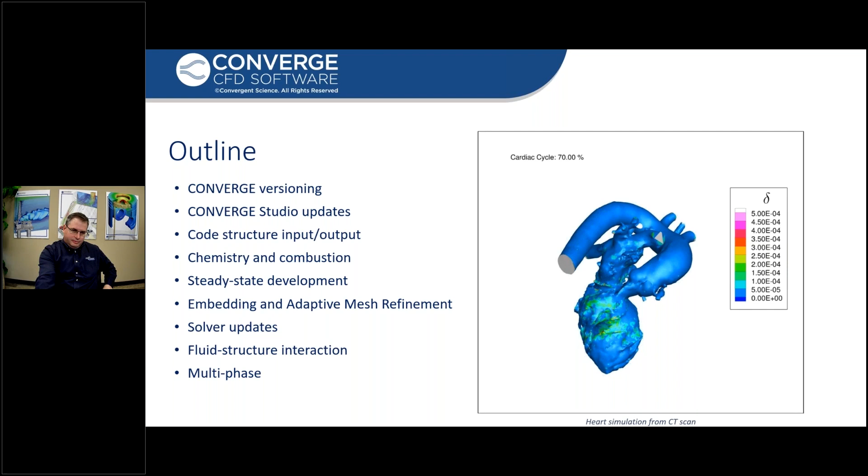So first of all, let's get the boring stuff out of the way here, and that's the CONVERGE versioning. For those of you that are current CONVERGE users, this actually is relevant. I know this doesn't seem really cool, but this is going to be relevant going forward when talking about CONVERGE versioning numbers. So traditionally, the first two numbers in the version have been representative of the major release. Those of you who've been with us for a while are familiar with 2.3, 2.4, 3.0, 3.1. Those represent major releases. And the minor releases are represented by the third digit.

With 3.0, we've had almost 30 of the minor releases. And so that's that third digit. Those have been released fairly regularly, every other month or so for some of these versions, and major releases have been released about every 2 years. We've also had multiple versions under active development and maintained simultaneously, recently as many as 4. The reason for that is we have customers that have been using older versions for some time. So the features that we would put in would get put into multiple versions, the current and the previous versions.

So going forward, we are going to adhere to the semantic versioning standard. I just want to state what the semantic versioning standard is, and then explain how that's going to impact CONVERGE. Given a version number, major, minor, patch, those are the 3 digits. The major version is when you make incompatible API changes, which for CONVERGE means input file changes. The minor version is when you add functionality in a backward compatible manner, so we add new features, but it still doesn't break inputs. And the patch version is when you make backward compatible bug fixes.

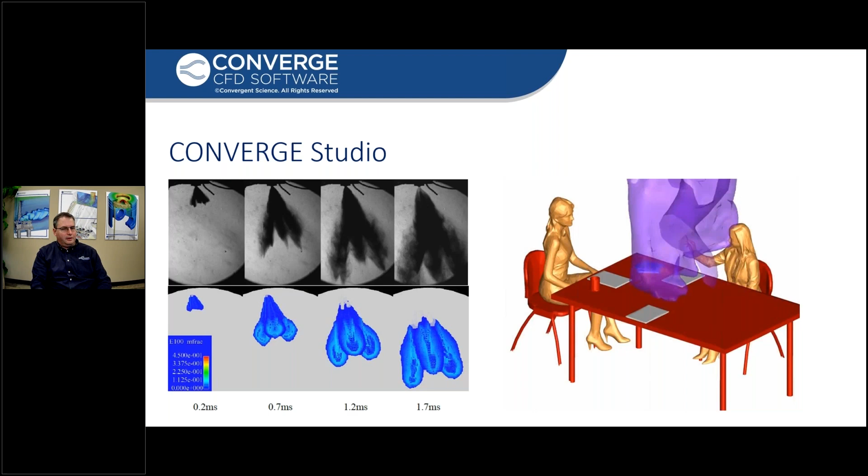All right, so first of all, let's talk about some of the improvements we've got in Converge Studio. So we've added something that's called a custom panel creation. So this came from a customer request. They wanted to have a simplified version of Studio available for some of their users that were not hardcore CFD users. These are some people within the company that needed to be able to run CFD, but wanted to simplify the inputs and just limit those things they could change.

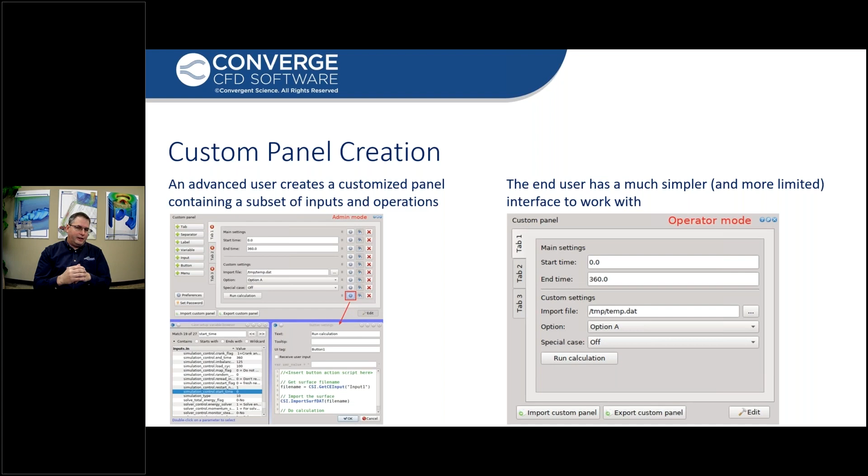So you still have the ability to go into the full mode if you want to make other changes that aren't given in this simplified panel. But this does simplify it significantly for those that don't want the full mode. The input files that get exported are still the full input files, so nothing's changing on the solver side.

So we've integrated ParaView into Converge Studio. As you're probably aware, ParaView is an open source software, and users are allowed to modify it and make changes to it. So we've done that and made a customized version that's simplified specifically for Converge, and we put this in Studio.

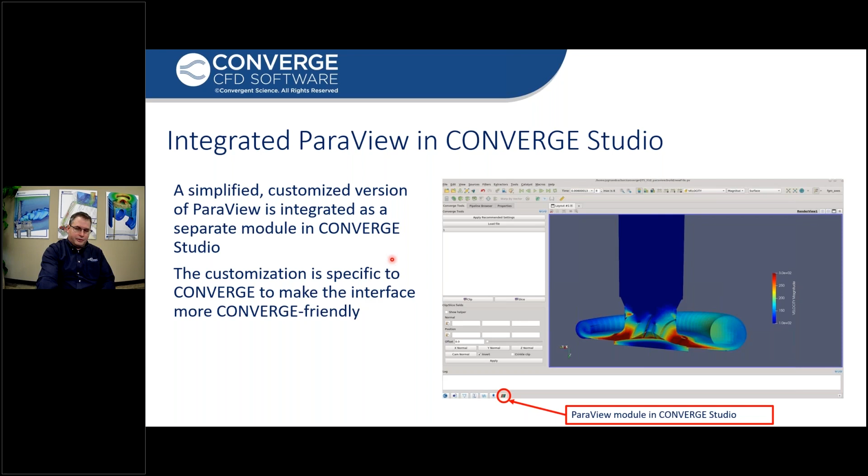So here are a few things I'm going to talk about. These are not currently available, but we anticipate these being available in a later version 4 release. So we're working on implementing basic CAD capability into Converge Studio. So this isn't going to be a full-blown CAD package, but we have licensed CAD capable libraries from Spatial, and we're working on implementing those to an interface in Converge Studio that will give you basic CAD capability.

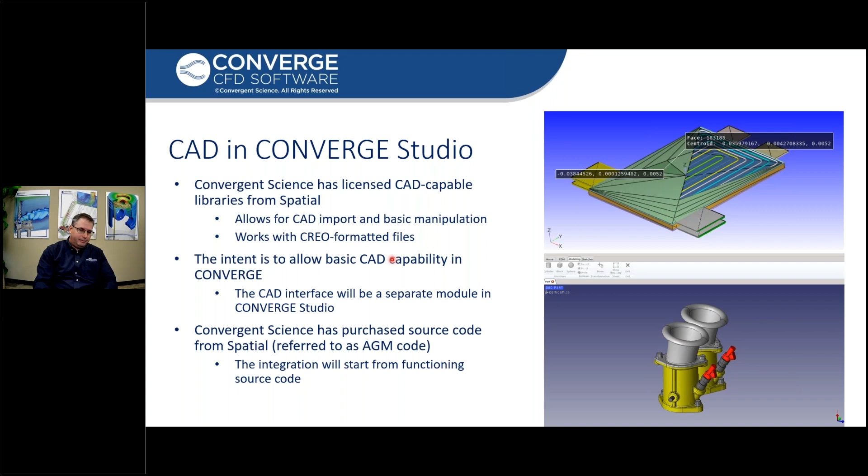We're going to have a new feature coming later in version 4 that allows Converge to do 1D simulations directly in Converge. We have had the ability and still have the ability to interface with other 1D codes and have the two codes communicate with each other at those interfaces between 3D and 1D.

The idea going forward here is to allow for the user to specify some portions of the domain that they import into Studio, specify some portions as 1D and some portions as 3D, and they'll be solved in the same Converge simulation, 1D and 3D together.

So a big part of that is the setup in Studio, allowing the user to specify what portions of the domain are 1D, and then creating from the actual geometry that's imported into Studio, creating one-dimensional cells. So this won't be parts that are linked together like you would see in some 1D setups. This is an actual geometry that you import and then specify what parts of it are 1D, and you use the tools in Studio to set that up.

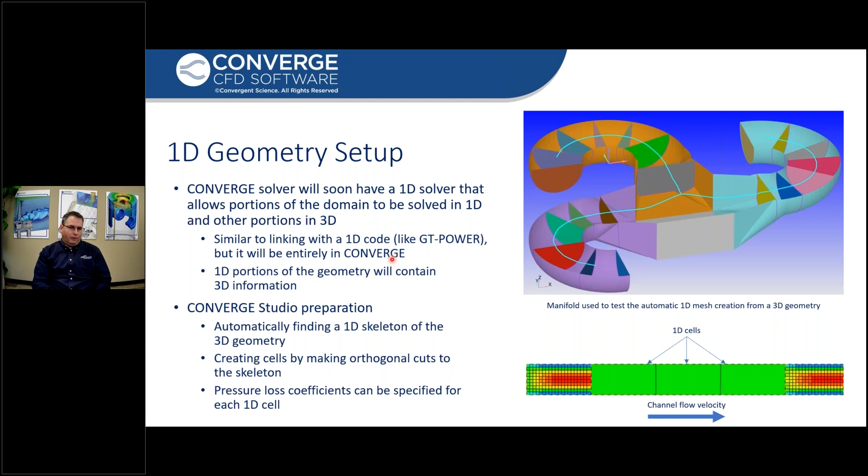So here's some other new features that will be coming out in Converge Studio. So we've got CGNS support for representing the geometry. Currently, we read your input geometry in a surface.dat format, which is our own ASCII format that we've come up with. Now you'll be able to import CGNS geometry directly, both representing the surface and representing intrinsic cell types if you're using an inlaid grid.

We're going to expand that custom panel capability that we showed to give application-specific setup capabilities. So we can use that same custom panel capability to create our own application-specific wizards that hide unnecessary details. We're continuing to expand our inlaid and boundary layer extrusion tools to make it easier for users to create inlaid meshes. And there's some improvement that's been made on the back end to speed up rendering of large geometries.

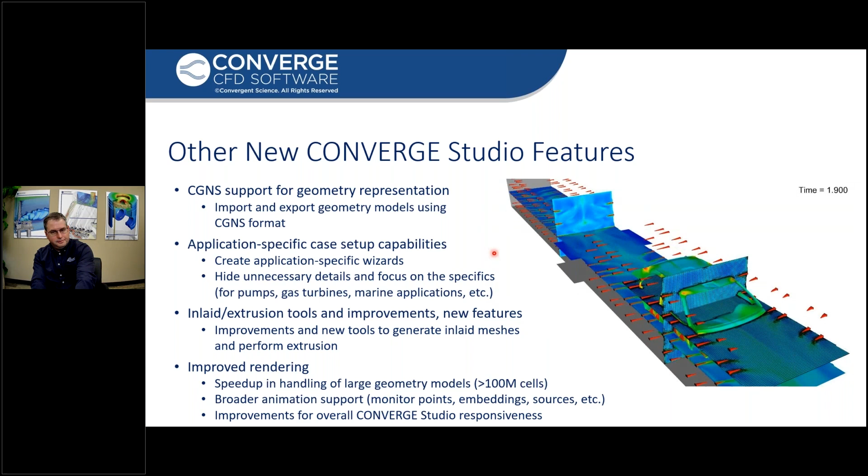So we made some changes to the I/O. Let's talk a little bit about output files. So as I mentioned, in Studio, you can import the surface geometry in CGNS format. We've also added the ability to output Converge post files in CGNS format. So we've had our own HDF5 format that's close to CGNS, but we've made some changes to it to make it actual CGNS format now. So those will still be able to be read into ParaView and TecPlot, but they should also be able to be read into any other CGNS capable post processor.

We've added the ability to export your 3D output for a limited set of regions. So if you only care about what's happening in the cylinder, you can output for region 0 only, if region 0 is your cylinder. That'll allow you to output significantly less output, and it can save on your data storage. We've added surface output to ParaView Catalyst. So previously we've just had cell data output, but now you can output boundary information on the surface to ParaView Catalyst.

We will soon have serial output capability. That will allow you to write output on only the head node if you're running a parallel simulation. So this can be beneficial if you don't have a high-speed parallel file system. You may have only the head node has access to the file system and each of the compute nodes don't. And so this will support that type of architecture setup.

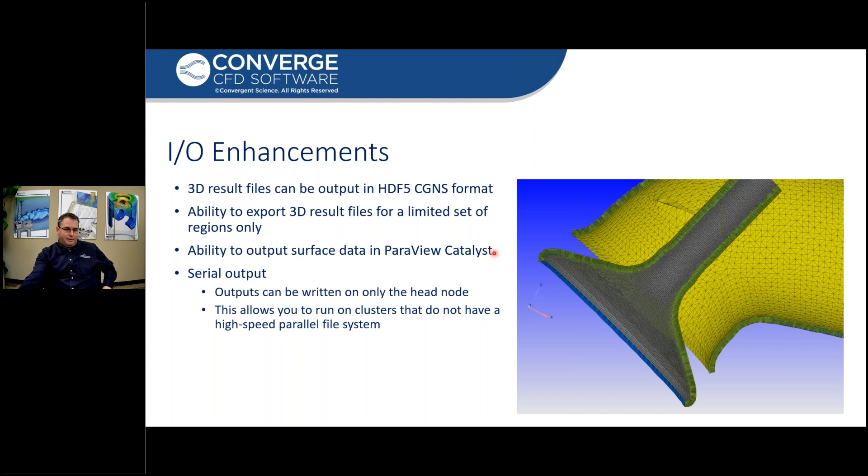We've added the ability for the user to create their own custom output files. When I say output files here, I'm talking about the line plotting data. So those of you that run Converge are aware that we have a lot of these text output files for doing line plotting. And sometimes you have to pull columns from many different files to put together into a single plot or single presentation. Well, you can specify ahead of time in Converge as an input file which columns from which files you want combined into one combined output file.

We've made some changes to our UDF framework. Going to version 3 from 2.x represented significant changes in our UDFs. And so there was quite a bit of effort that users had to put in updating their UDFs for version 3 and 3.1. So version 4 is going to have some tweaks to that UDF framework. We've got a lot of changes that have been made in the back end, and this works better with our back end. This will not represent a huge change to your UDFs. It should be on the order of 10 to 15 minutes per UDF to change some of the headers at the top. You're not going to be changing the main code in your UDF.

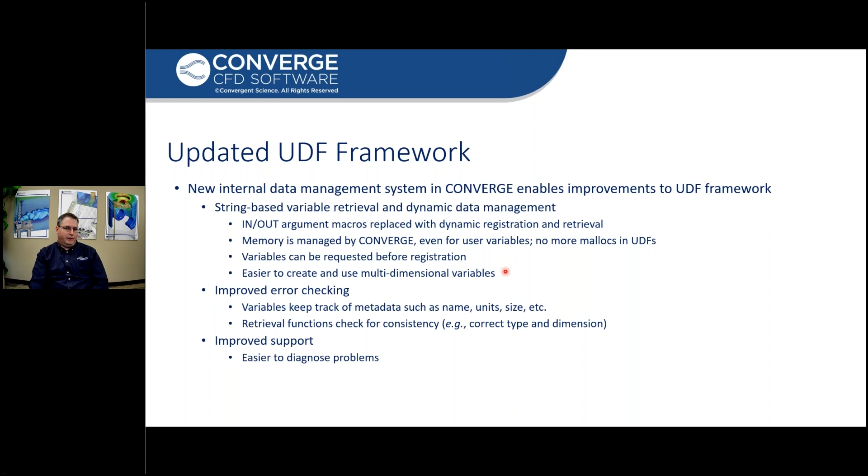All right, let's talk about changes that are coming up in chemistry and combustion. So we've added what's called a surrogate fuel composition blender. So let's say you have some alternative fuel, or you have some fuel that you don't have a lot of data for yet. You know some of the physical properties for it, but you don't know everything, and you don't have all the data necessary to run it.

Well, the surrogate blender tool allows the user to input some of the targets: molecular weight, hydrogen to carbon ratio, your oxygen to carbon ratios. You can give it octane or cetane number, ignition delay, anything that you do know about the fuel, you can input, and then you tell it which species you want to use for the composition.

And then the surrogate fuel blender will try to match your targets by varying the species composition from the species that you're allowing. So this is a way to come up with a fuel composition if you don't have one already ahead of time, if you just have a fuel that you know some properties for.

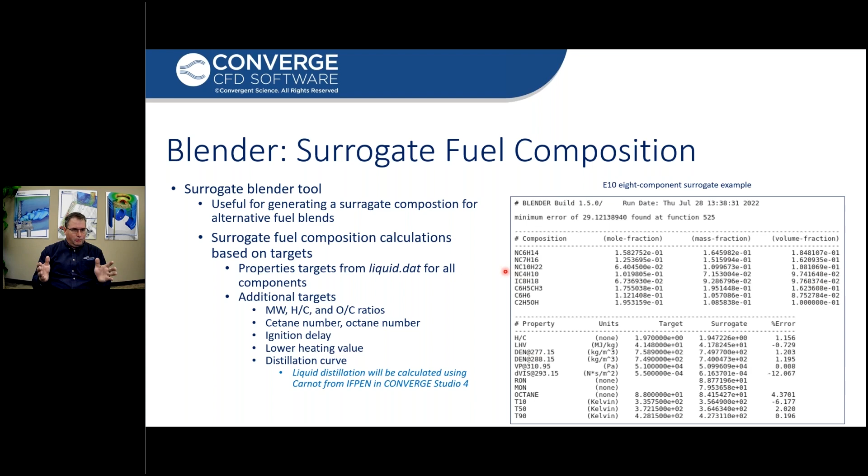We've added more mechanism reduction and tuning capabilities in Converge 4. We've had capabilities for quite a while, but we've got some additional features here. So we've got a utility to reduce and tune a mechanism based on 0D ignition delay and 1D flame speed. This enhances those that were available in version 3.1. You can also do mechanism tuning based on laminar flame speeds using our built-in premixed 1D solver.

Converge 4 allows for unlimited targets for the 0D and 1D reactors. We've also added sensitivity analysis for several of the 0D and 1D reactor types.

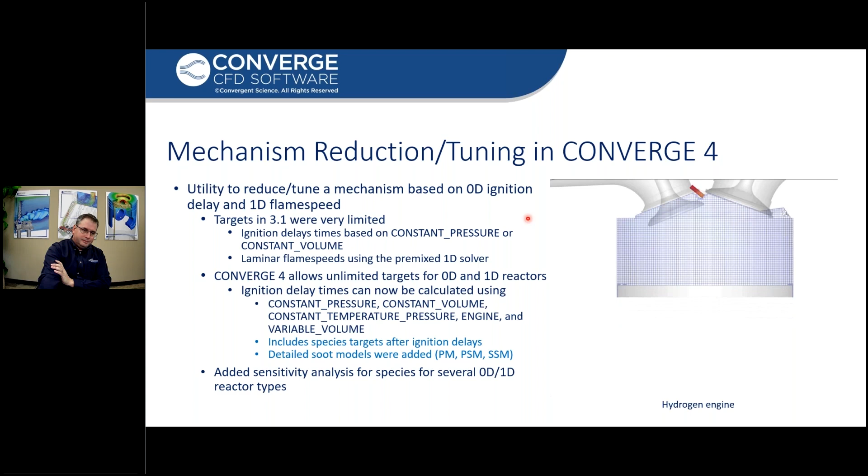So, the thickened flame model. The thickened flame model has been available for LES in some pre-release versions in 3.1. We've had this available for a while. These become standard features in version 4. The idea with thickened flame is to give you a sufficient number of grid points inside the flame. We need at least 4 grid points inside the flame to get an accurate flame speed.

For LES, we typically don't have enough of the turbulence viscosity to give us that flame thickness to give us the 4 points. And so what the thickened flame model does is it artificially thickens the flame to give you sufficient grid resolution, and it trades off the viscosity associated with that thickened flame for chemical reaction rates. So if you do the proper trade-off, you can still get the correct laminar flame speed by thickening the flame. So this is not something that we invented. This is something that's been around for some time and useful for LES.

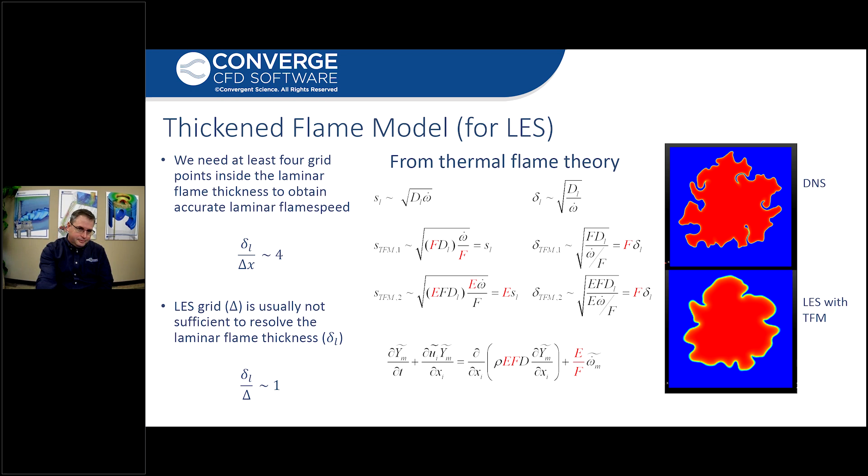New for version 4 is thickened flame for RANS. The same principles that make thickened flame useful for LES also make it useful for RANS in situations where your laminar flame speeds are going to be very, very fast. You're going to have very thin flame thicknesses. So one example of that would be when you have a hydrogen fuel. Hydrogen flame speeds can be much, much higher than what you typically have in other hydrocarbons.

And so you can have turbulent flame thicknesses that are smaller than 1 millimeter. And resolving those flame thicknesses, even in a RANS simulation, becomes too expensive. So what's been developed is thickened flame for RANS, which makes simulating hydrogen much more reasonable when you're using a thickened flame model.

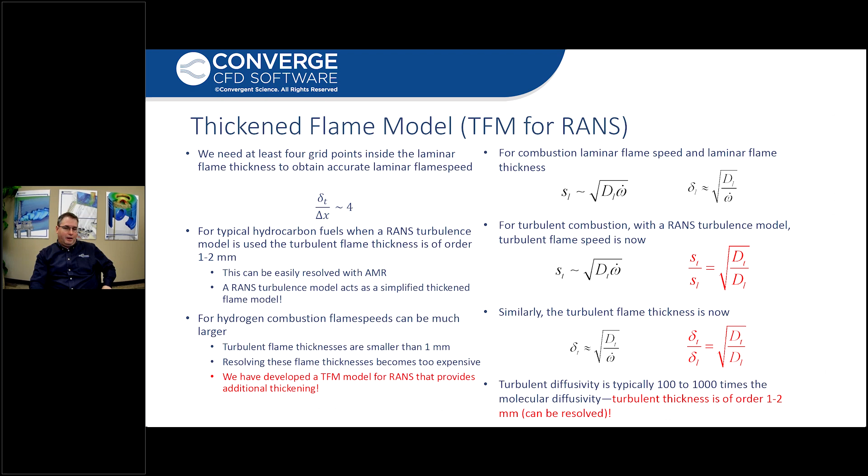So here's just a quick example of that. What we're showing here is the pressure trace for hydrogen combustion. Here we don't use any thickened flame, and we have 4 levels of AMR. This would be consistent with what you would see in a typical hydrocarbon fuel combustion. And you're seeing that you get basically a massive spike. In fact, the simulation was stopped here because all the combustion just went off instantaneously, because the hydrogen laminar flame speed is so fast.

Okay, and then we've got 4 other plots that are shown here, and these are for different thickening factors. So you can see with the thickening factor of 16 and 3 levels of AMR, that's the blue curve that's a little bit off. The combustion's a little slower than the other 3, but the last 3 with different thickening factors and levels of AMR all fall on top of each other. On the right, we're showing the heat release rate for those examples.

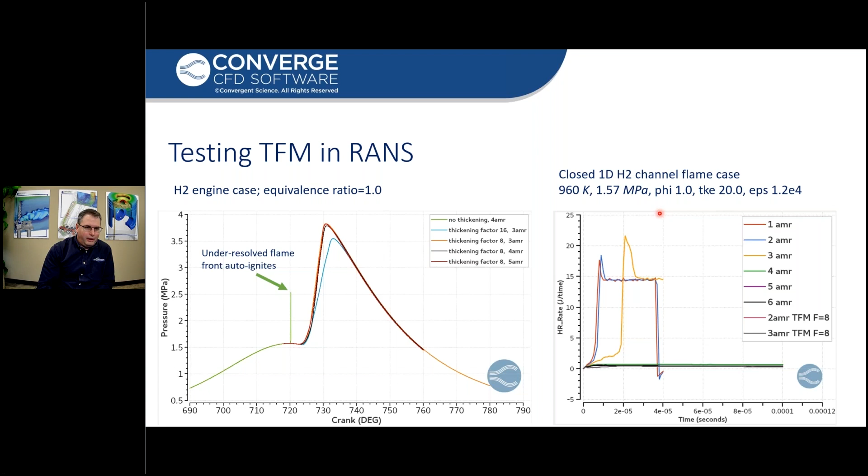So this thickened flame, we're actually really excited about this. Hydrogen combustion is very popular these days, and we need a reliable way to simulate hydrogen combustion in engines.

So the ECFM3Z model has been modified to allow nitrogen. We've had general fuel definitions in the past where you specified your carbon, hydrogen, and oxygen species ratios, but it limits what you can simulate. We want to be able to simulate ammonia and hydrogen, so adding nitrogen to the general fuel definition allows us to do that.

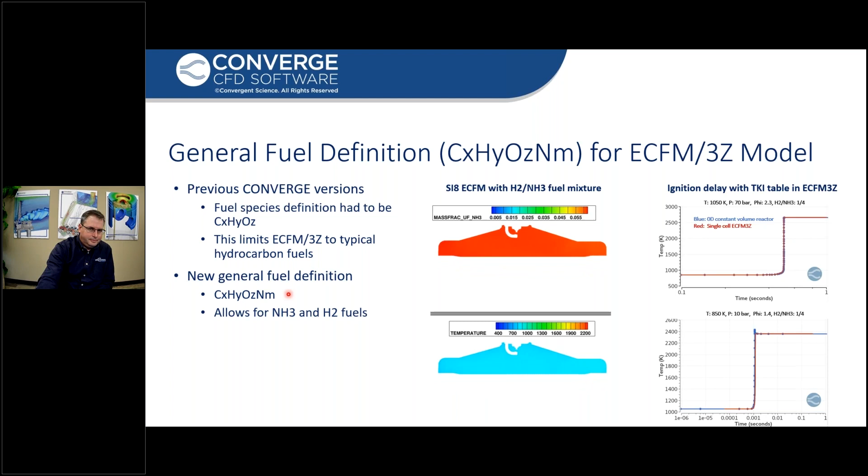We've got a new spark ignition model. The conventional way of doing spark ignition is the user just specifies a region in between the electrodes of the spark plug where we would add a source, and that source was usually just fixed in that location. Well, we know that's not physical, that's not the way it really happens. So we've worked with both Argonne National Lab and Southwest Research Institute to add a new spark model that includes some of the best of both of those research efforts we've been working on with them.

So there are some additional features. We've got a secondary circuit model if you can put in the electrical information.

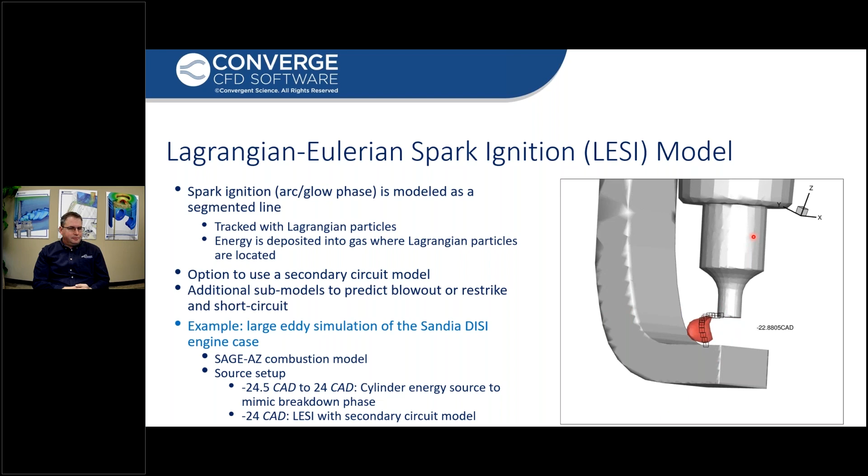There are several other things we're doing for combustion development. We're continuing to make improvements as part of the Computational Chemistry Consortium, so we're improving diesel and gasoline surrogates with that. Also as part of the Computational Chemistry Consortium, we're looking at alternative fuels like hydrogen, ammonia, and methanol.

One of the things that's not available yet, but will be soon, is the quasi-steady state species approximation. It allows us to have some of the species in your mechanism treated as pseudo-steady state, so they're not actually transported, and that simplifies the number of species being transported to speed up your simulation. We're also looking at using artificial intelligence, specifically neural networks, to replace the direct chemistry solve.

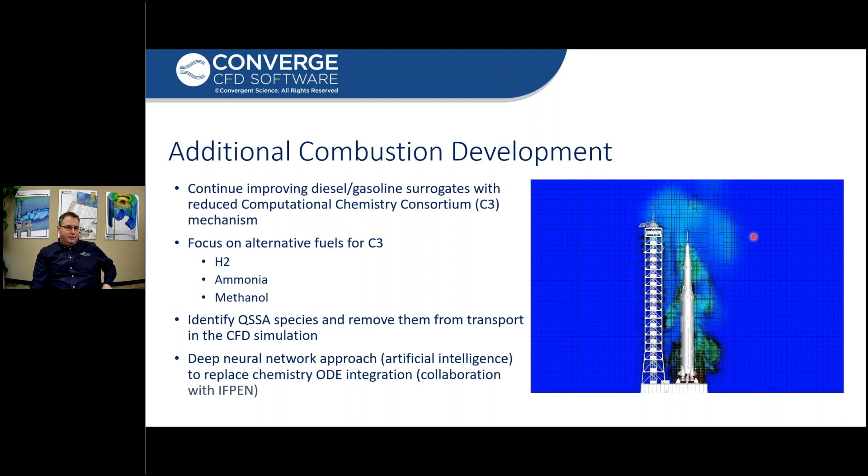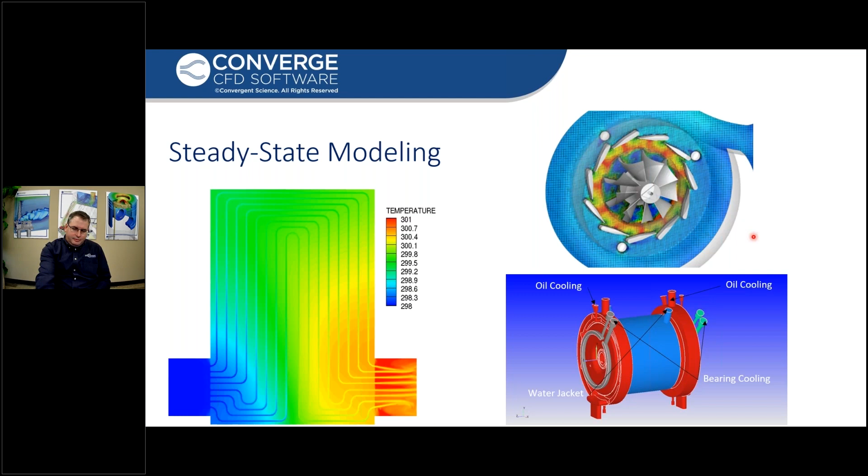So we spent a lot of time working on steady state modeling. We'll talk briefly about what we have coming up in version 4 with that. In the past, the steady state solver available in Converge is a pseudo transient solver, so it uses time marching to reach steady state, and we still have a d/dt term on the left-hand side.

So the convergence rates for a pseudo transient solver can be a little bit slower, resulting in longer run times, and sometimes the residuals don't converge very well. Now, the residuals not converging does not mean that it's not a well-posed problem. The residuals sometimes don't converge because when you're doing a transient type solution, you have some behavior in steady state solutions that is inherently transient and not steady state and continues to oscillate. So that can make it difficult to get residuals to converge. That doesn't mean it's an error, but we do need residuals to converge if we're going to take this steady state solver and use it in something like an adjoint solver for optimization.

So we've been working on a new under relaxation based steady state solver. You may see an acronym URS, and that's what it stands for—the under relaxation steady solver. This does not have a time step specifically, but it uses under relaxation. Now, that under relaxation used in place of a transient term still gives it somewhat of a transient behavior, but it's not transiently accurate. This is typically much faster than the pseudo-transient solver, and the residuals converge better.

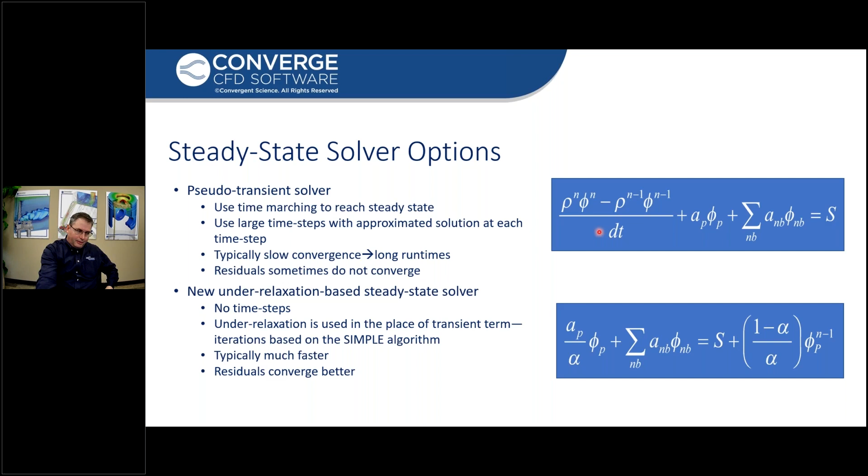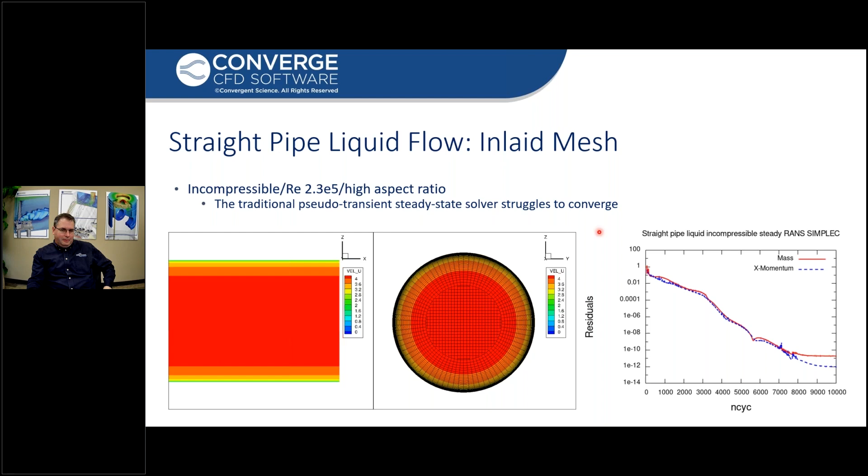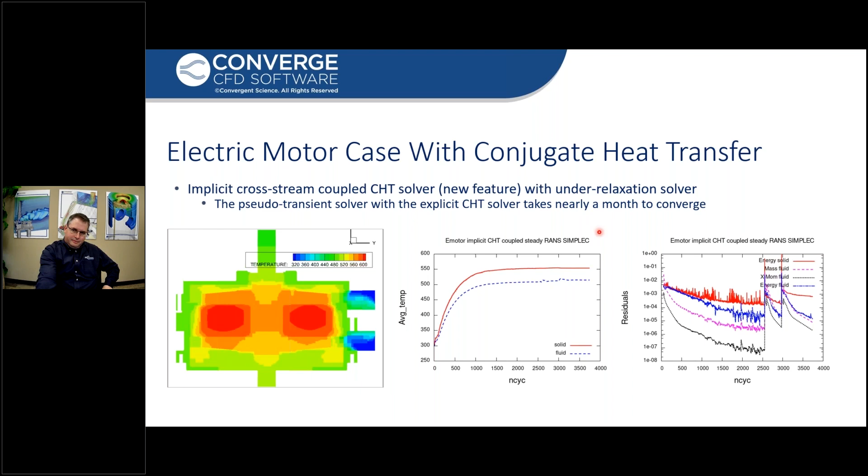Okay, so that's steady state examples with just flow. What about sprays? What about combustion? A lot of the steady state cases we want to simulate have spray and combustion. We'll talk briefly about what we're doing with steady state, similar principles apply. I'll talk about what we're doing with sprays, and similar principles apply for combustion. This is not currently available, but it's something that will be available soon in a later version 4 release.

The Lagrangian spray framework is inherently unsteady. We've got random introduction of particles, and their interaction with the turbulence model introduces some randomness. So this unsteadiness causes the Eulerian field around the spray to also be unsteady. Now we want a steady solution because that's preferred for design exploration. As I mentioned, when we're using an adjoint type optimizer, we want a steady solution — not just adjoint, but any DOE type of study we're doing.

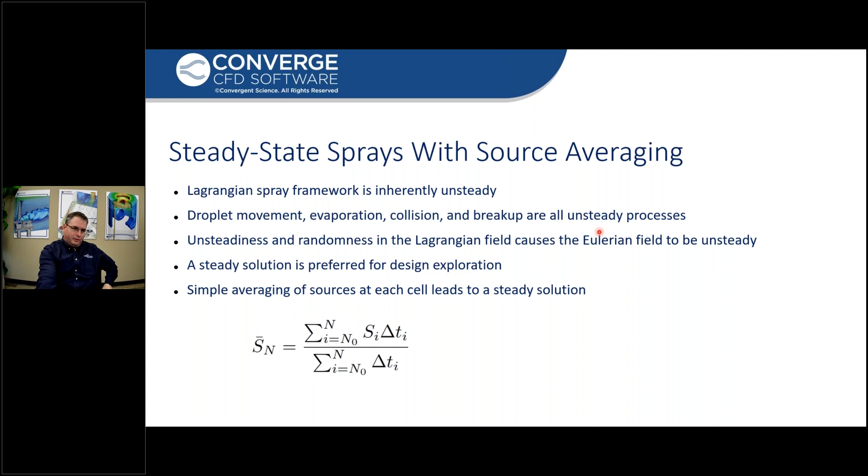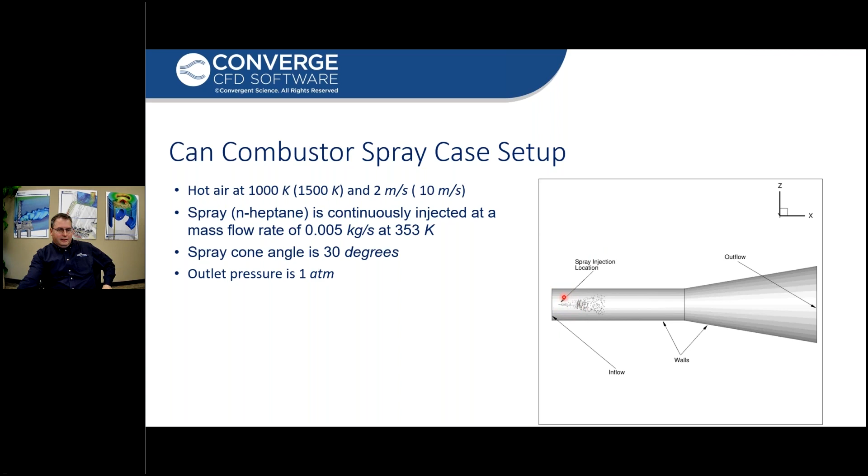So one approach is to just do simple averaging of all the sources to get us a steady solution. Instead of just taking the instantaneous values and going steady from the instantaneous, our sources that are introduced in each cell from the Lagrangian parcels represent a simple averaging of the sources at those locations. Here's an example of that: a can combustor spray case, with some of the setup parameters here. We're injecting a spray at the left, and flow is moving from left to right.

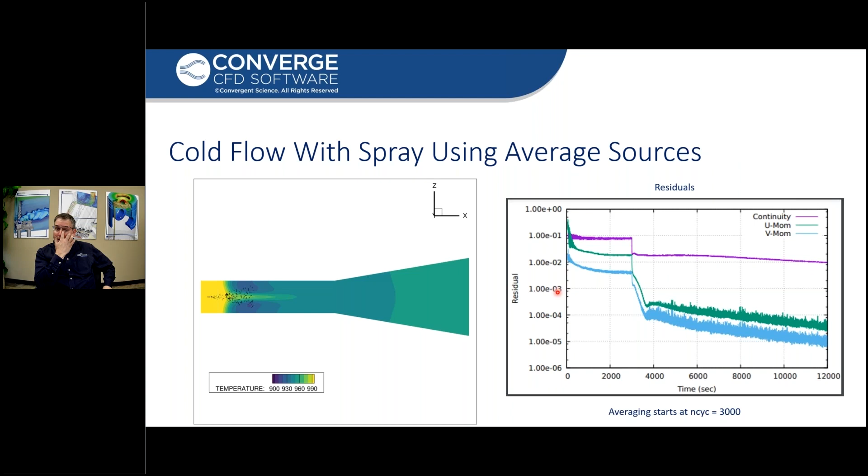Here's what the residuals look like if we run that case using instantaneous sources — they fall to a certain point and then flatten out, because those sources are changing every cycle that we're running them, introduced with randomness. Now what happens if we average those sources? You can see the resulting temperature field on the left. Whether I use instantaneous sources or average sources, that field looks very similar, but the residuals fall much nicer when we're doing source averaging.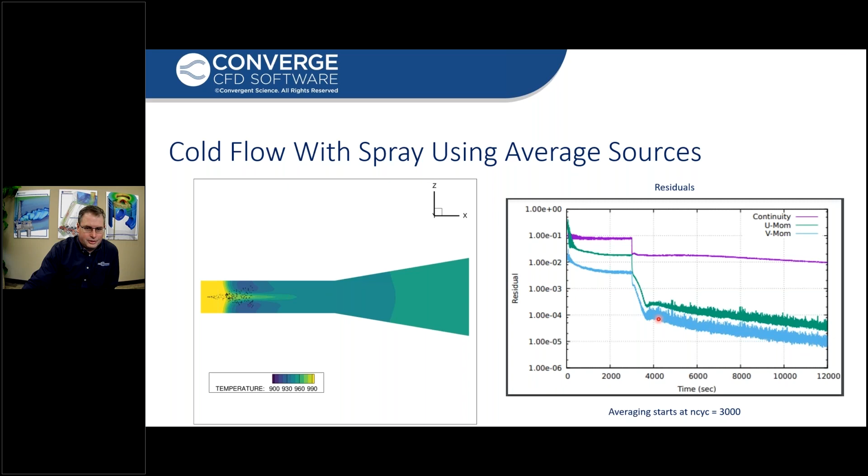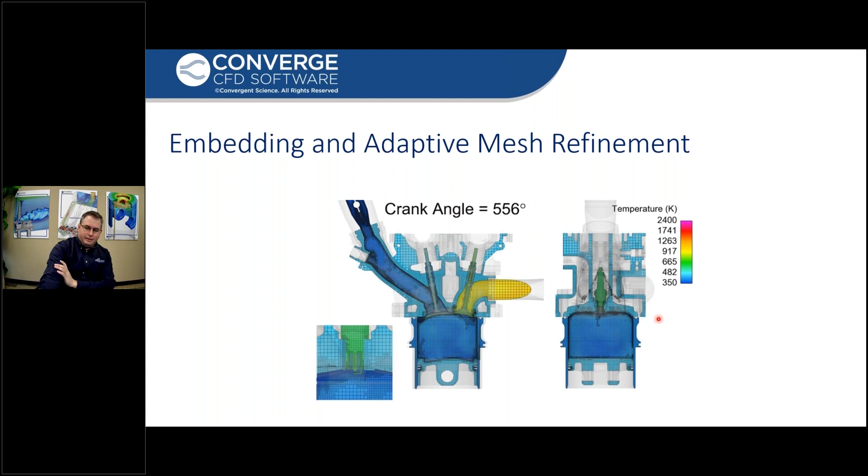Alright, let's talk a little bit about some improvements in embedding and adaptive mesh refinement. These features are a result of requests we've had from clients. Clients have asked, can I have my embedded region or embedded shape move with a boundary? Let's say you wanted to put a box on a piston — you've got some phenomena you want to look at on top of the piston, and you want that box to move with the piston up and down. We didn't have that capability, but it's something we've added.

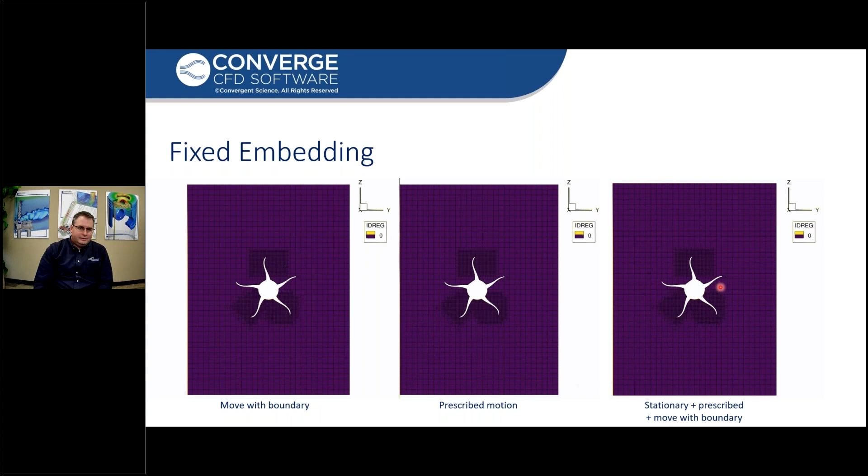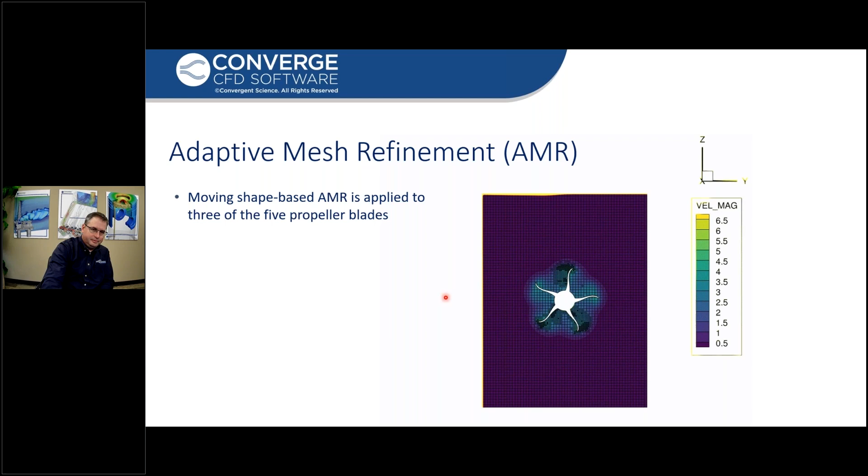Okay, let's talk about some improvements in the solver.

In version 3.1 and previous versions, the Crank-Nicolson scheme was available only for momentum. Crank-Nicolson is a mix between fully explicit and fully implicit. Converge users know we have a slider between implicit and explicit, a value from 0 to 1 that moves you from explicit to fully implicit. Crank-Nicolson would be a value of 0.5, where you're doing a direct average of the implicit and explicit. But that was only being applied to the momentum equation.

In Converge 4, the Crank-Nicolson scheme is applied to the other transport equations as well. Density, momentum, energy, and species transport are all done with a mix of implicit and explicit. Crank-Nicolson is known to be second order accurate in time, which helps reduce numerical diffusion and gives you more accurate results. You can get more accurate results with larger time steps than what you have with first order, either implicit or explicit.

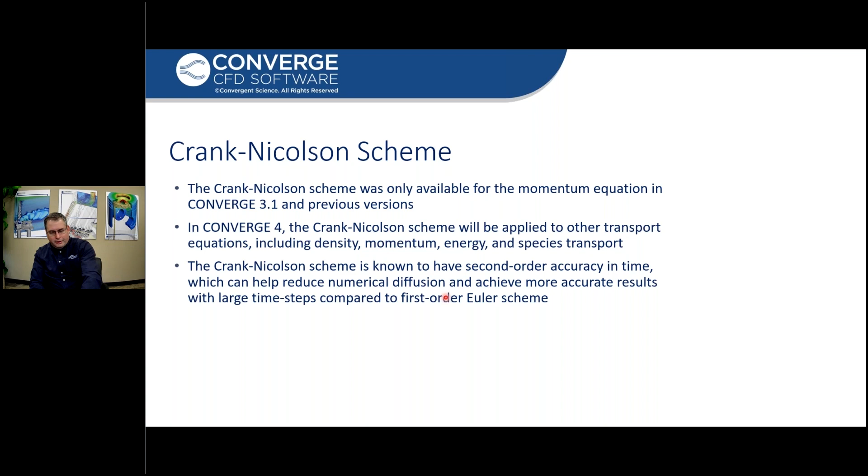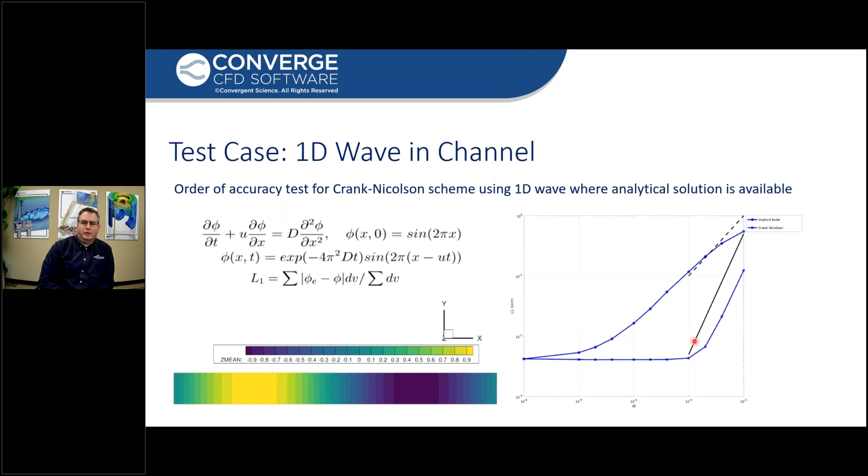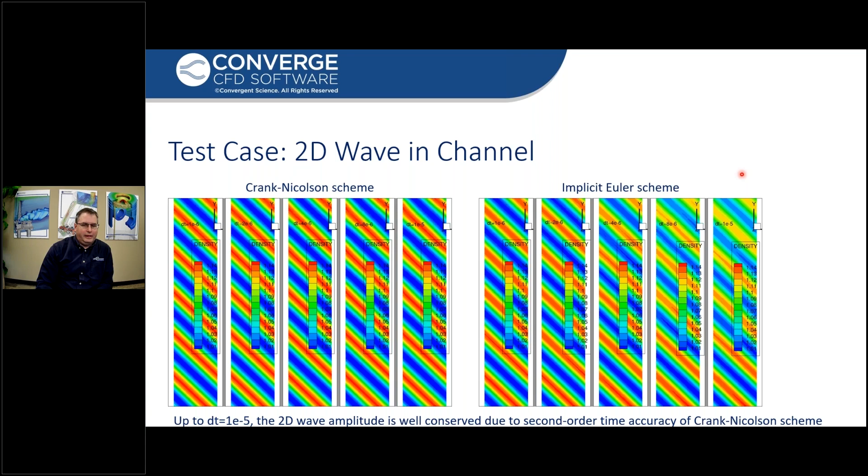Here's a 2D wave in a channel. As this wave propagates through the channel at different times, the wave should maintain its strength. The strength is illustrated with red and blue for the peaks and valleys of the waves. On the left is Crank-Nicolson, and you can see as we progress in time that the strength of those peaks and valleys remains very consistent. With fully implicit, you can see that over time the strength of the waves diminishes significantly. That's the numerical viscosity from using a fully implicit scheme that's destroying those waves.

We added multiple streams in version 3.1. Rather than having all your fluid information in a single stream with a single solver, we introduced the ability to have different fluids in different streams, solids in different streams, and completely independent solver settings for those. This allows you to do a conjugate heat transfer simulation of your engine. You could have gas phase in the cylinder, your piston, liner, and head all in different solid streams, and an incompressible liquid coolant in a separate stream.

That's great to have, but it's not as useful if they all have to progress at the same time step. In that engine example, the combustion in the gas phase drives the time step to be very small for accuracy—smaller than needed for transient accuracy in the incompressible liquid cooling stream. That stream should be able to use much larger time steps and still maintain accuracy.

So in version 4, we've expanded the multi-stream capability to give different time steps for different streams, so transient streams can progress at a time step appropriate for them. You can also have some portions of your domain, some streams, solved steady state. In the conjugate heat transfer engine example, we could make the solid stream steady state. This accelerates your solution time significantly when you have vastly different time steps required for different streams.

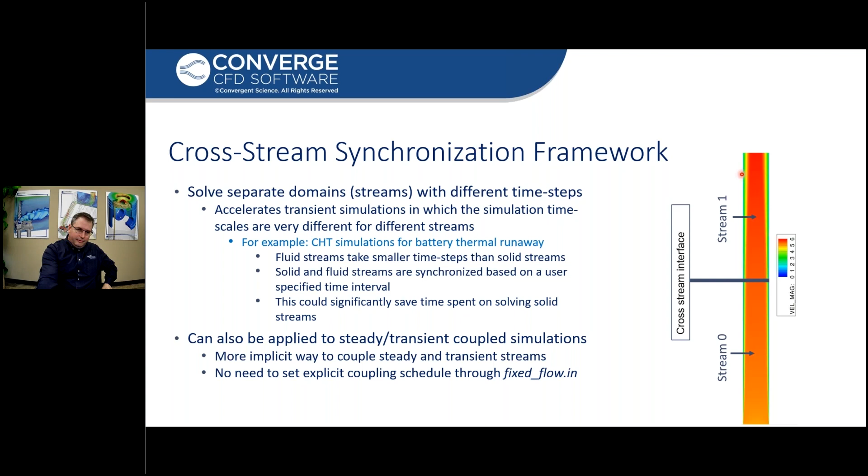Let's look at some examples. When we use these different time steps, they're synchronized at the larger time step—essentially subcycling the streams that require a smaller time step until they reach the time step of the higher time step streams. In this example, I've got two streams, left and right, with the same flow. They're connected with an interface and flow is allowed to pass through it, but I'm using different turbulence models, which result in different time steps.

So I'm synchronizing these streams every 10^-3 seconds, and if you look, you can see the flow goes through without any artifacts taking place at the stream interface in between.

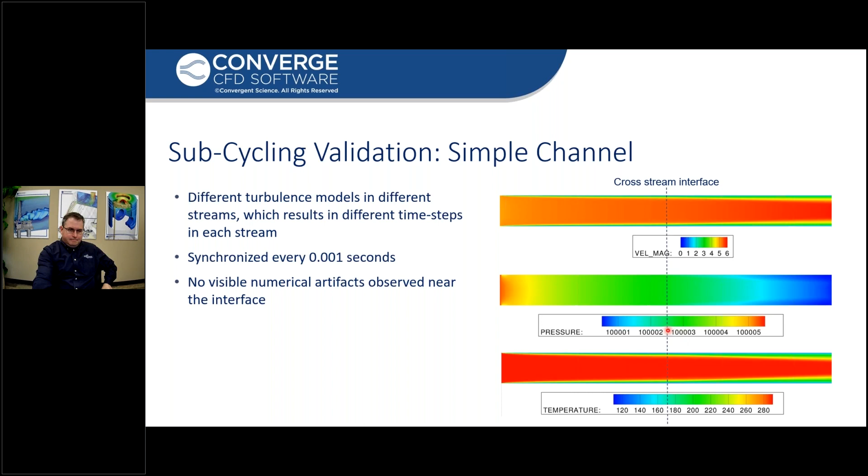Okay, here we have a vortex that's convecting between 3 different streams. So each stream is selecting its own time step. And you can imagine where I have the vortex, that stream that has the vortex is going to have a much smaller DT than the other 2 streams. And now look at the vortex as it passes through that stream interface. And you're going to see that there are some artifacts that we get.

It's not possible to do this perfectly if you've got different time steps and different streams. And you're going to see as it passes through that there are some numerical artifacts. But in general, it looks really good. And this allows you to get significant improvements in your runtimes.

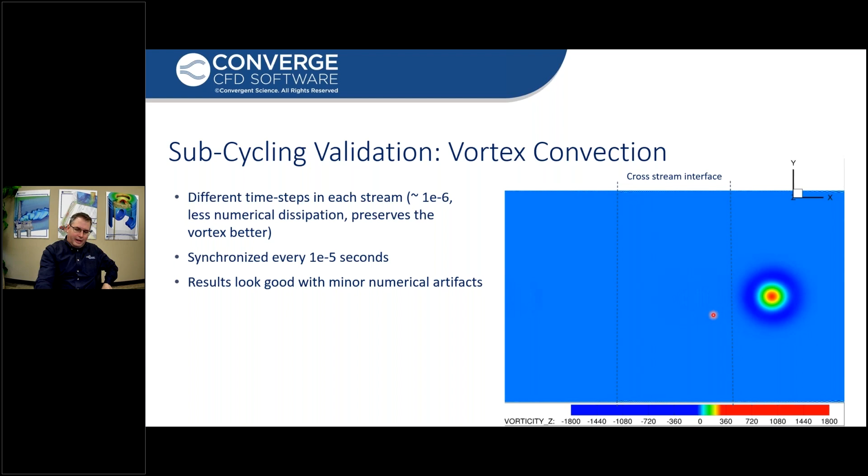Okay, so here's looking at thermal runaway in a battery. So we've got flow going over a battery, and as it's heating up, you can see the temperature that we've got, the gas is heating up. Now the battery itself is also going to get hot. So you can see now where the heat source is being applied. You can see the battery is heating up. The battery is operating at a much, much larger time step than the fluid surrounding it.

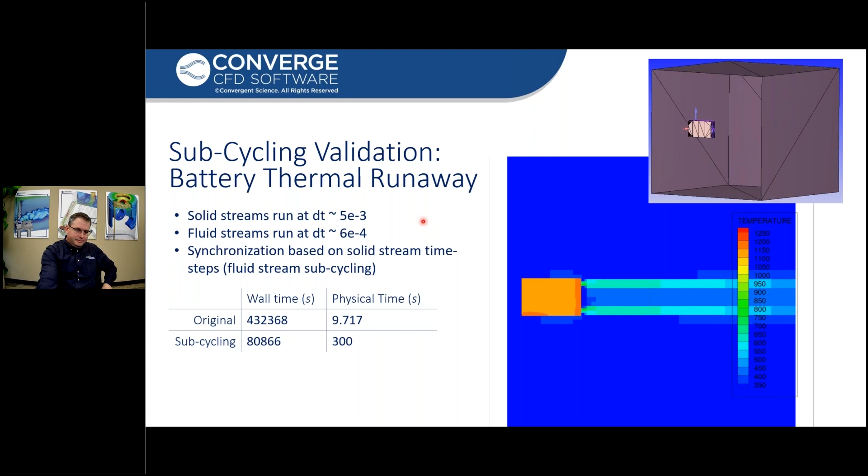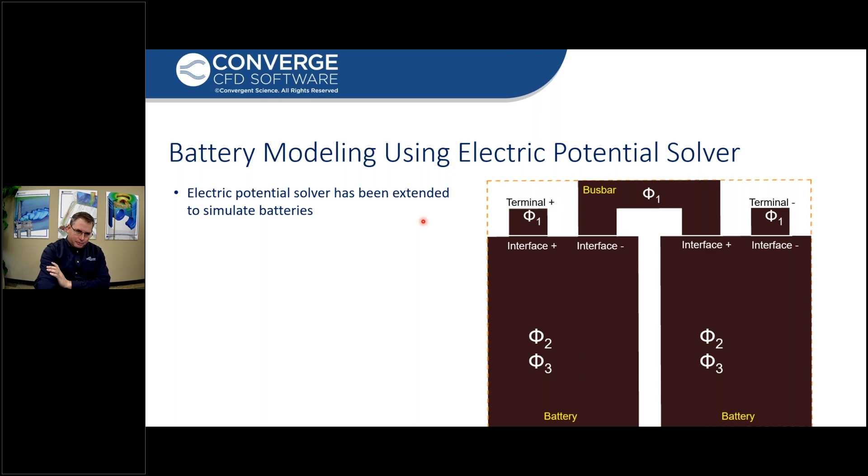We've added an electric potential solver. So this allows us to solve for batteries. We can do a better job of simulating batteries. So a quick example that was run with the batteries is we looked at different boundary conditions. Now these results should all be the same.

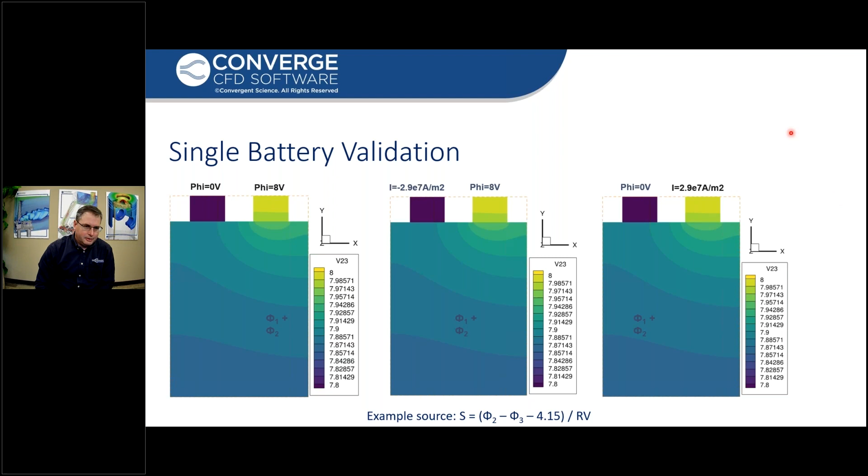When looking at the electric potential field, it should be the same for all 3 of these, but we're applying, on one of them, voltage and voltage. Another one, we've got a current and a voltage. And then we've got a voltage and a current. So the voltage and current were chosen here such that the results should be the same. And you can see that they are. The resulting electric potential fields are the same.

So using these capabilities, we can now simulate battery packs. And you can look at the evolution of a battery pack temperature field as the batteries discharge. So you can see as they start up, as they progress through time, you can see how the discharge is heating up the batteries.

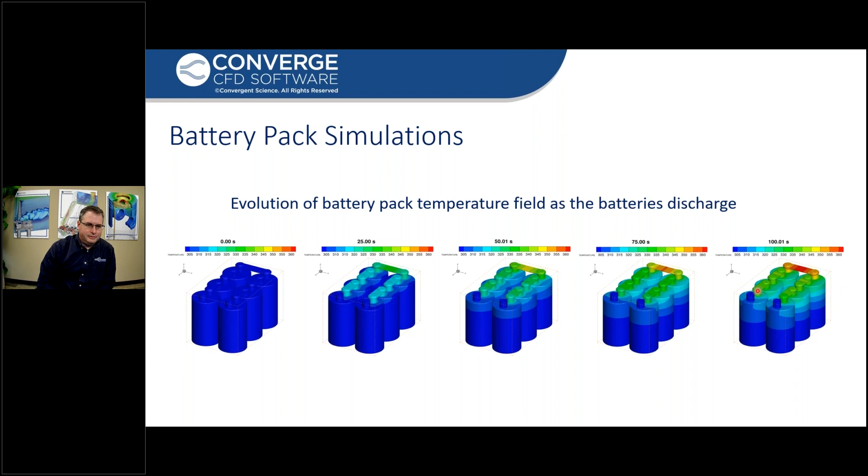So we've got improved move surface and update grid performance. When you look at the time that's taken in different parts of the simulation, if you look in your log file, you'll see that in version 4, the amount of time spent in move surface and update grid should be significantly less. We've added support for ARM architecture. We're continuing to work on GPUs. There's not a lot that's going to be available in the initial version 4 release, but we are continuing to do GPUs. We're adding some artificial intelligence and machine learning for some models and for optimization.

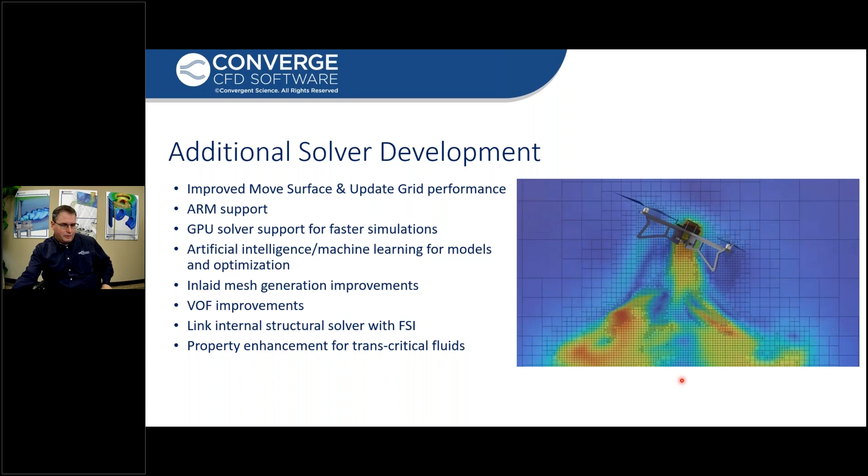Doing more with inlaid grids. We've got VOF improvements. We're linking the structural solver with FSI, and I will show some examples of the VOF and the FSI. And then property enhancements for transcritical fluids. As we get into rockets, the fluid properties become very, very important.

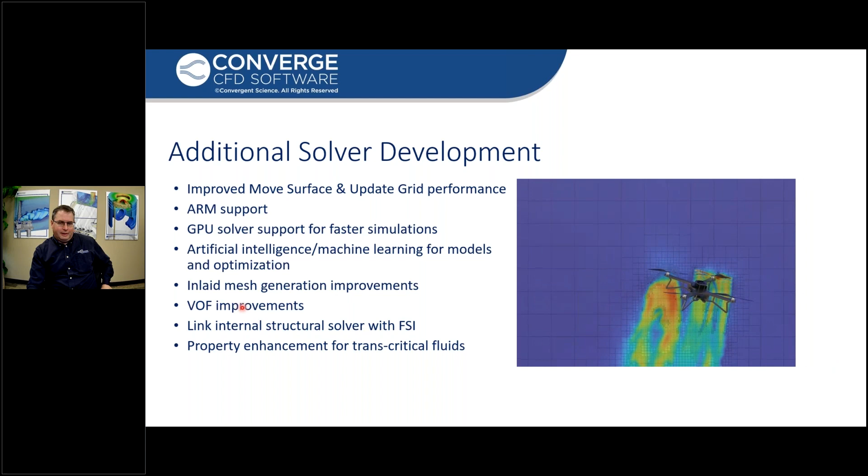Let's talk briefly about some of the improvements that we're doing in FSI. So we've got fully implicit FSI. So we did have this available as a hidden feature in 3.1, now a standard feature in version 4.

So for some scenarios, when you have similar densities between fluids and solids, the simulation can very easily go unstable if you have explicit coupling. So what we're looking at on the right here is coupling explicitly and implicitly for an object that is buoyant, that is moving up within a liquid.

And what we're showing here, let's look specifically at the oscillation side to side here when you've got velocity side to side, and you can see we start getting these oscillations that go ballistic here on the explicit coupling. And if we're using implicit, they stay very, very clean.

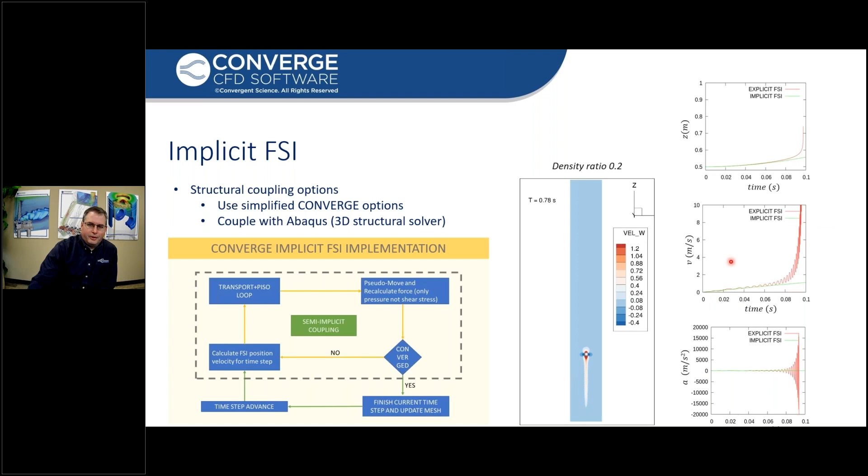We've got a membrane model. So simulating a membrane can be very useful if you're doing things like blood flow through arteries, or if you're doing diaphragm pumps, parachutes, balloons, airbags. These are all examples where using a membrane can be useful. So there's some assumptions that go into this.

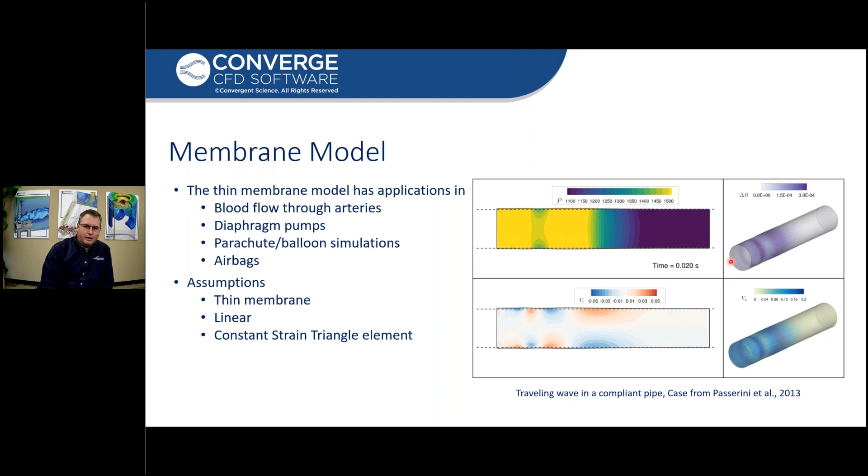What you're seeing on the right here is flow through a pipe, and you're seeing how the pressure waves are morphing the boundaries of the pipe. Here's a more extreme example. This is using a membrane model to show the filling of a balloon. So what you're seeing on the right here is the mass flow rate of air into the balloon.

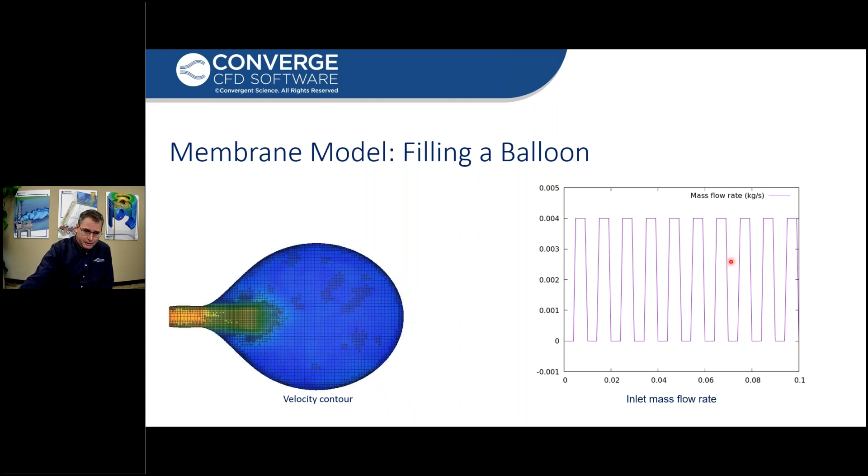You can tell that whoever's blowing up this balloon here has a very consistent flow rate of his breath as he's blowing up the balloon. It makes for a pretty fun simulation result, though. It looks pretty cool.

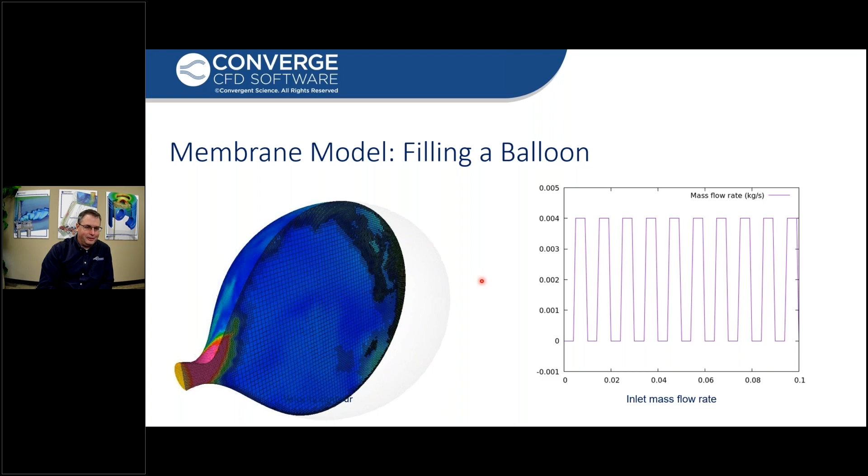So we've also added a surface deformation model, and this is for modeling deposit and erosion. This is very useful for doing urea deposit for aftertreatment simulation. So what this model does is when you detect that you have deposits on your surface, the triangles that represent that surface are actually moved. They're moved consistent with the deposition. So if I have urea that's depositing, the surface triangles move up.

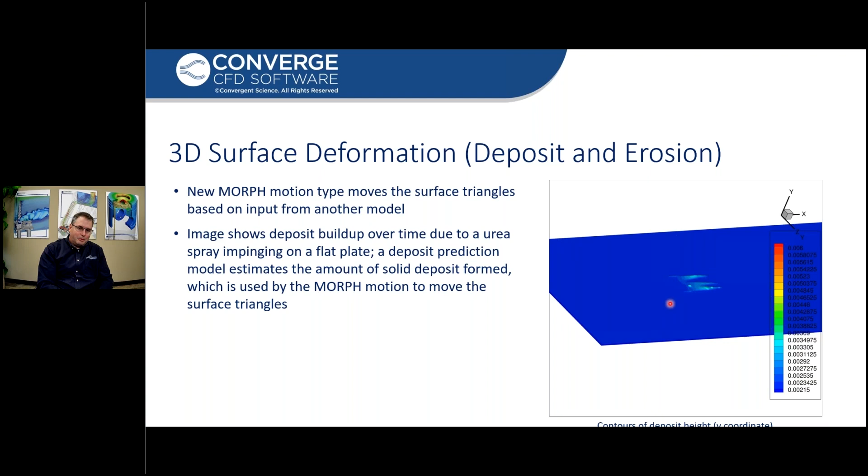And what you're looking at here is the height of the surface. So as it changes from blue, that basically means we're adding deposits there by moving those triangles upward. So this allows you to more accurately predict the flow when those deposits exist.

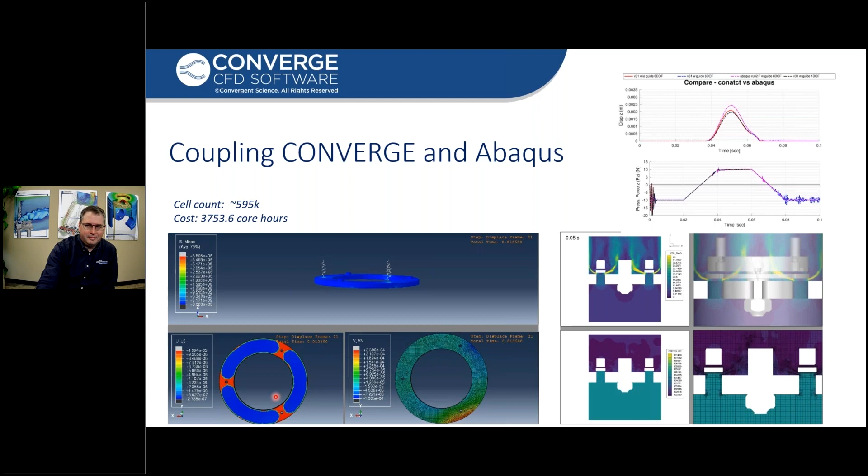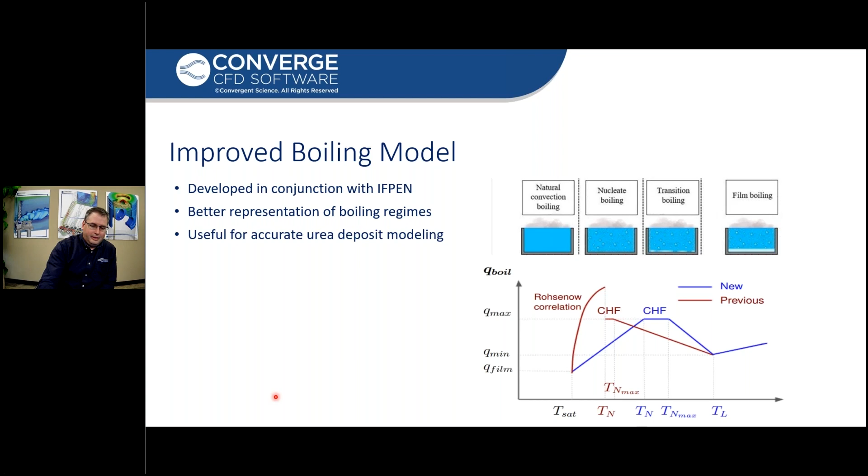So we got a few improvements I want to hit briefly in multi-phase. So we've got an improved boiling model. This was developed in conjunction with IFPEN, which gives you a better representation of the different boiling regimes. And this is useful for accurate urea deposit modeling. One of the test cases that was run for testing this new model is the Lauer experiment.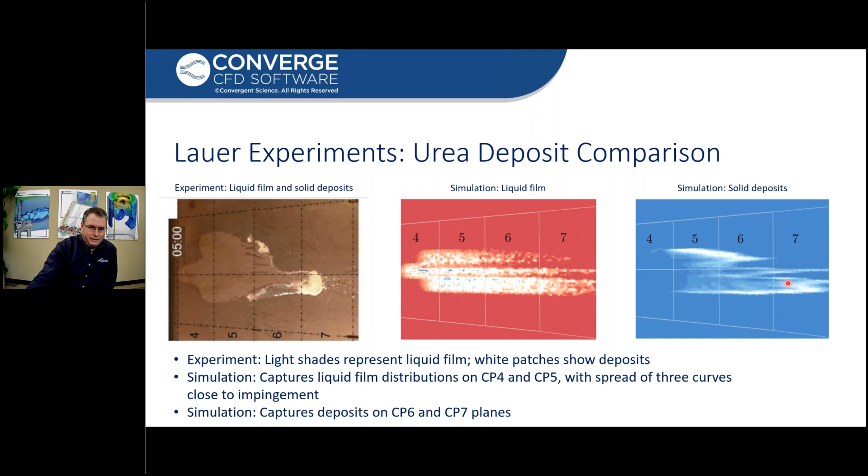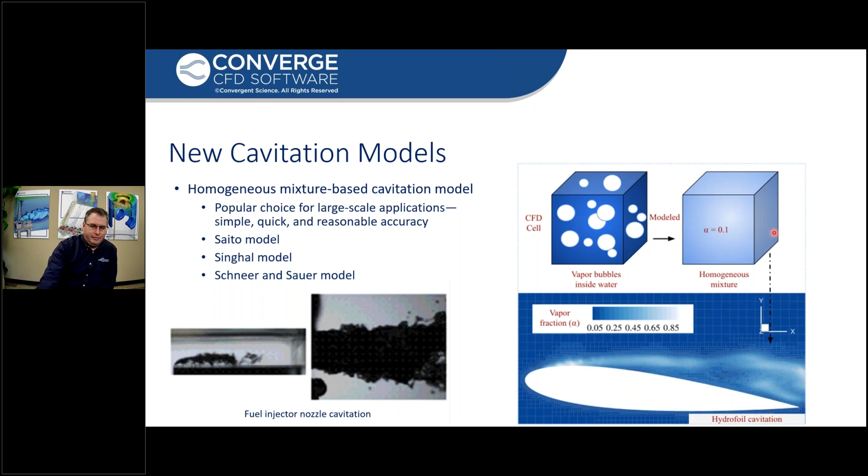We've also added some new cavitation models. These are homogeneous mixture-based cavitation models. Some of them have benefits for specific applications, and so that's why we have multiple models in here. There isn't one that's universally the best. We got a couple example cases we've done. We ran the Winklhofer case. This is with the Schnerr and Sauer model, and then a hydrofoil cavitation with the Singhal model.

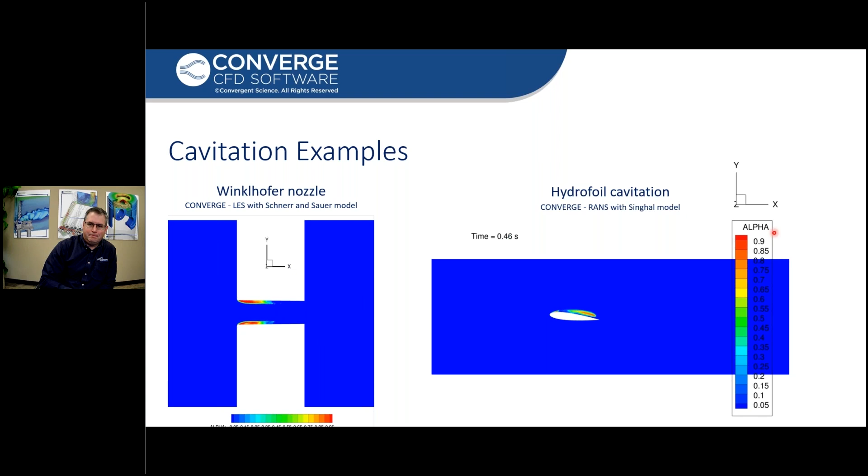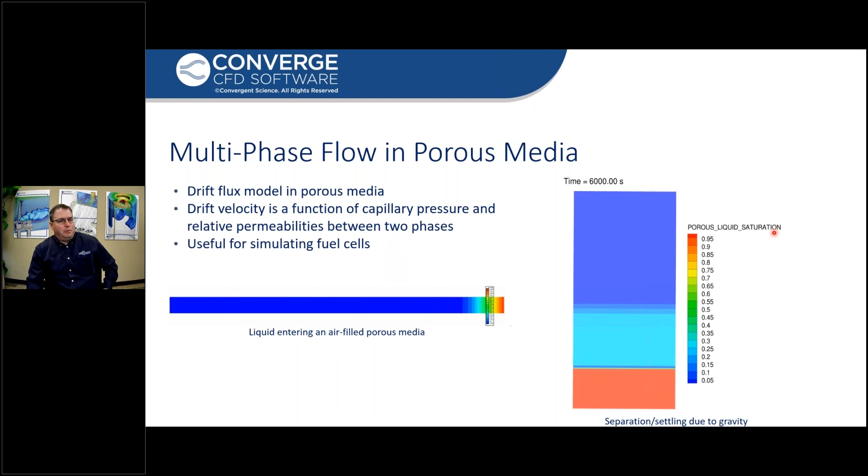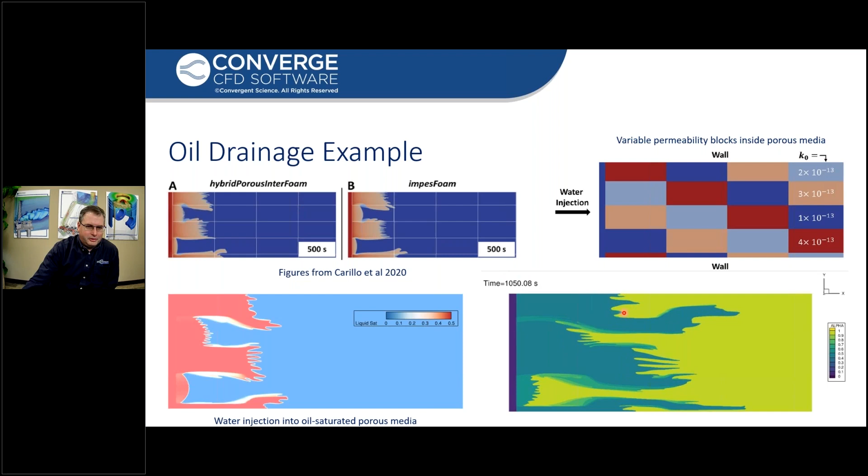So we have water moving in, and the domain initially has oil in it. And as the water moves in, it displaces the oil. So these are results from another code, for example. I'm going to run that movie one more time here. So you can see as the flow moves in, it permeates at different rates based on the permeability. Agrees very well with the simulation from OpenFOAM.

So additional multi-phase features that we've got in there: we've got a deposit solidification model, temperature dependent contact resistance and interface boundaries. We've continued to improve ELSA, and there are two features that were available as UDF only that are now standard features. That's the ELMO model that was developed as part of the Spray and Combustion Consortium, and also the swirl cone angle predictor from the same SCC consortium.

We have boundary specific wall interaction, so I can set boundaries to behave differently when they're struck by parcels. And we were also adding gas parcels. That's not available initially in this first version 4 release, but will be available soon.